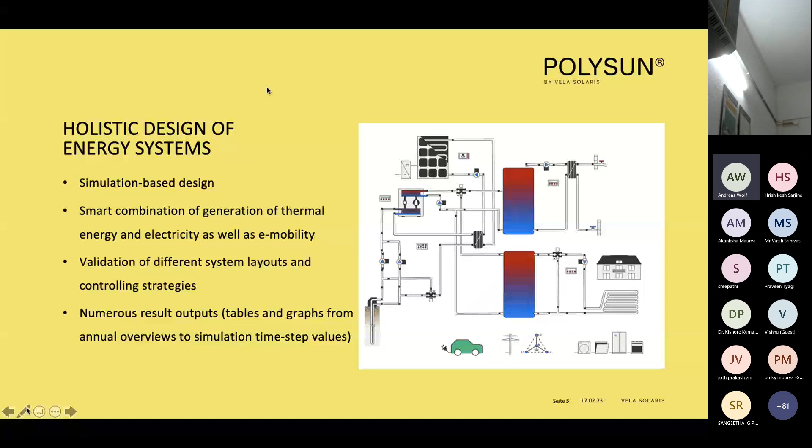Now I would like to pass on directly to the software, because that's why I'm here. So you should see the screen now. At the beginning, when you use Polysun for the first time, the screen is not really all that interesting because we still don't see the graphical user interface.

What Rishikesh has shown to you was several screenshots of the systems. We will see them in a moment. Now we are just starting because we are using Polysun for the very first time.

So we start usually with the wizard. The wizard is a starting help, an assistant, a project assistant. It's not really what Polysun is about, but this way you can start a project. Usually it pops up automatically, but you can also start it from here at the top.

Then you should first select the location. You can select the location from a map or from the database. We have worldwide weather data already implemented in the software, so you can choose the continent, the country, and then the city. You see there are many possibilities here.

But if you don't find your city, or if you want to go, for example, into the mountains, then it's good to open the map. This is OpenStreetMap - it's not Google Maps, but it works pretty much in the same way. You can search for a location, or you can zoom in.

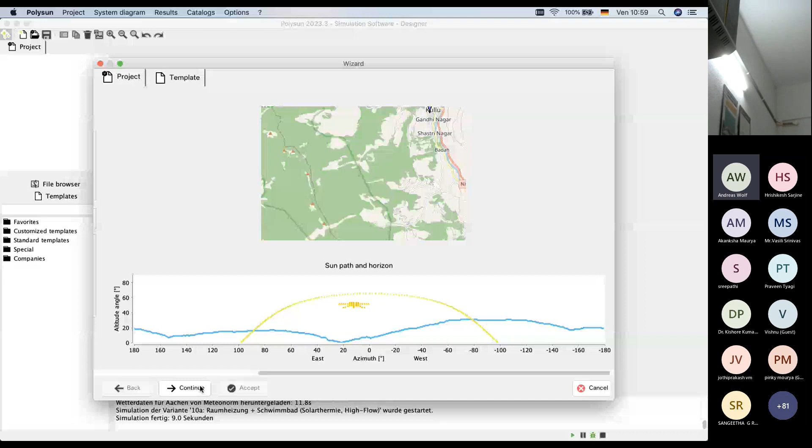And as I have mentioned, we have an enormous amount of templates. This filter can be very helpful to find the templates in the beginning. Now we want to start with a simple solar thermal system only for domestic hot water. Later on, we will look also at other templates.

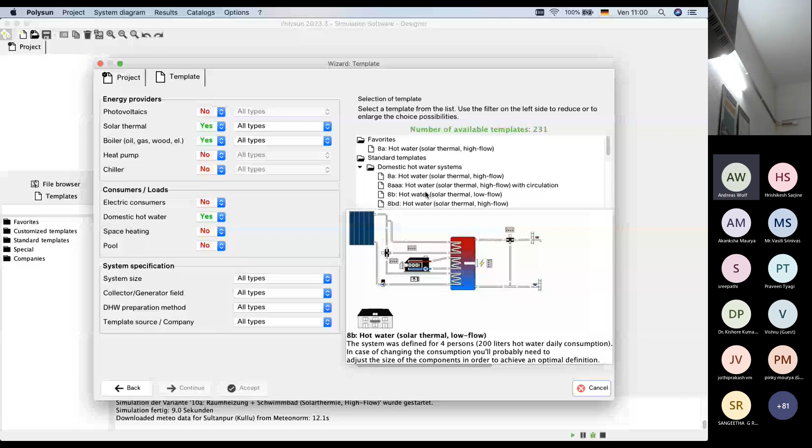When you hover the mouse here over the systems, you see the different system layouts. So in this moment, you should not select your template according to the components, but according to the system layout. Now we choose simply the first one, you click on continue.

And then you can define your domestic hot water demand, but we can do this also in a more detailed way later on. I will show this to you also then on the graphical user interface.

And then Polysun will suggest to you a certain number of collectors. Well, this is just a very small system. So if we make, for example, the daily hot water demand larger, 400 liters at 50 degrees, and then we continue, you see the suggestion is different.

Then you can choose your solar thermal collector from the database here. As you can see, you have here hundreds of solar thermal collectors. They all have been tested.

If you don't find your collector, additionally, you can also enter your own collector by selecting a line, copying a line, and changing the marked line. So that means you can work really with any solar thermal collector you like.

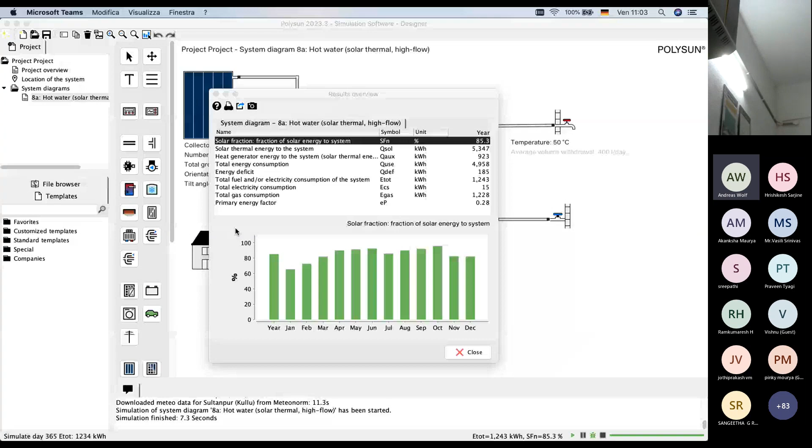And that means currently the simulation is running, and then we will get automatically the first results. But before we talk about the results, you must know that, as you can see from here, we have a wide array of results.

So you see, you cannot just view the results in one way. You have many different ways how you can view results. I will show this to you in a moment, how you can view them.

But first, I want to present to you the graphic user interface, because that is what you can see here. That is what you really work with in Polysun.

And you can see you have here on the left top, you have first information about the location of the system. As you know, we have chosen this location in the mountains. But of course, you can also change again the database. You can change the location again here.

If you click here on edit, you can see again the horizon. From that location, you see the exact sun path of that location.

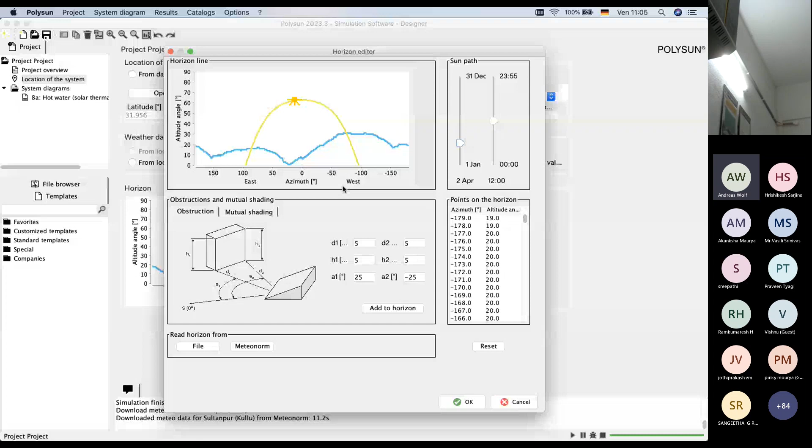This will always be adapted to the location which you choose. If we had chosen, for example, a location in southern India, this would be totally different. You can also add buildings as obstructions and consider the shading through that.

You have got here a list of the system diagrams which you can simulate. Currently we have only one because we selected it from the wizard, but you can easily copy the system here. We can rename it, we just name it two, but you can give it any name. And now you have the same system twice.

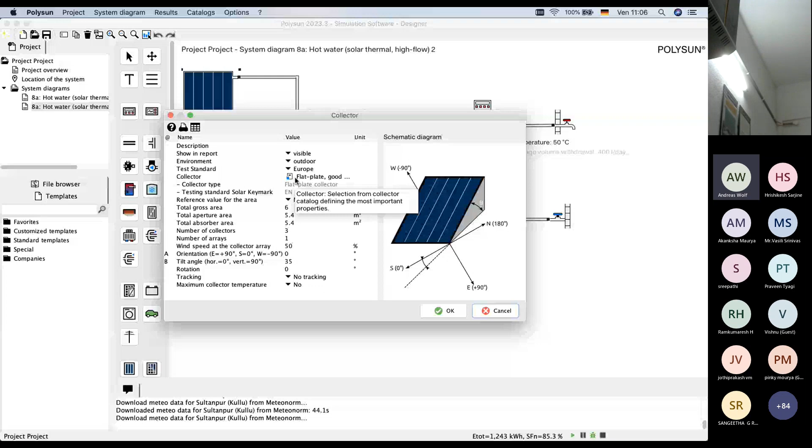Now you could, for example, do adaptations to the system very easily by clicking on it. If you want to interact with this system, you double click, a dialog window opens, and you can do your settings here. You can change the number of collectors and get back into the catalog where you can choose your collector or create your own.

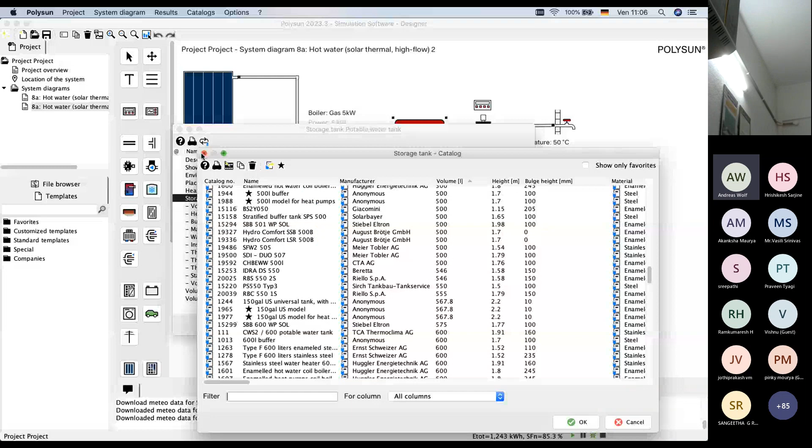This doesn't work only for the collector, it works for any component. So if you want to exchange the tank, try out a larger or smaller one, you go into the tank, choose another, and simulate again. Or you want to choose another boiler, or substitute the boiler with a heat pump - it works exactly the same way.

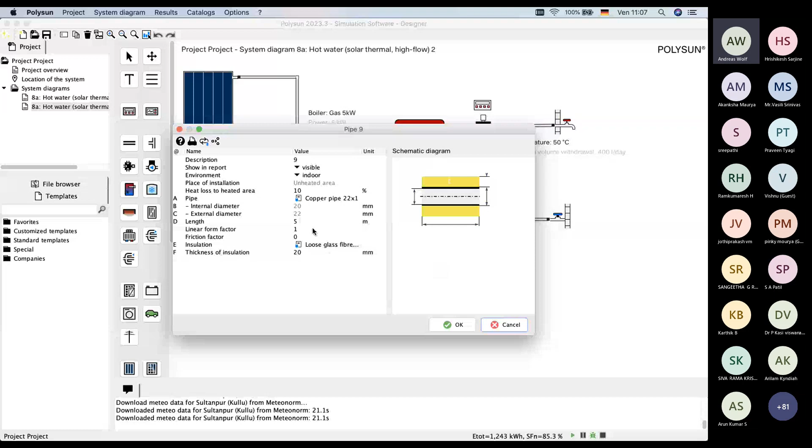You can even click on every pipe. You can make the pipes longer or shorter, change the diameter, change the insulation, and then calculate the heat losses which you have in the single loops.

You can also work here on the hot water demand, so you can change the settings for it. We've seen this briefly in the wizard, but you can do that also directly here.

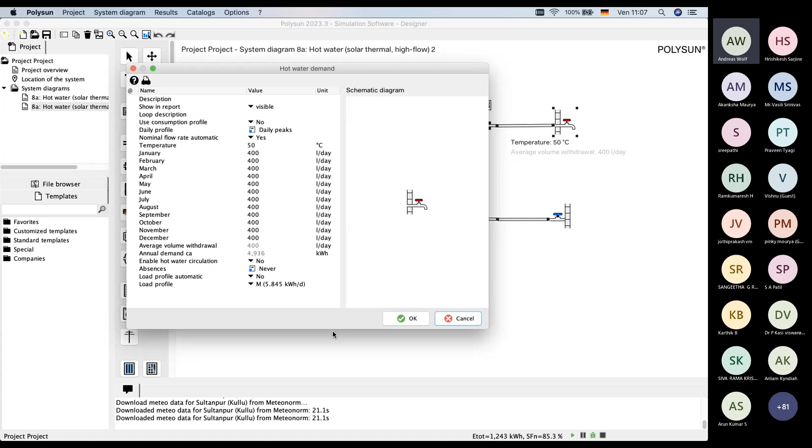When you have changed one value, you can compare the systems. You go back to the menu results, to system comparison, and you see the results of this system concerning the energy balance compared with two systems. This can be very easy and well done, and especially students will really understand how systems work.

So you see, one way to load a system is from the wizard. Another way is by copying it. And another way is from the template list down here. You see how many templates you have - at the moment you can't see them, but these are only 5 folders.

You can open these folders and you see subfolders filled with many templates. Then you open these folders, and when you scroll with the mouse over them, you see so many different systems, so many different hydraulics, which you can try out and see which one works best for your system.

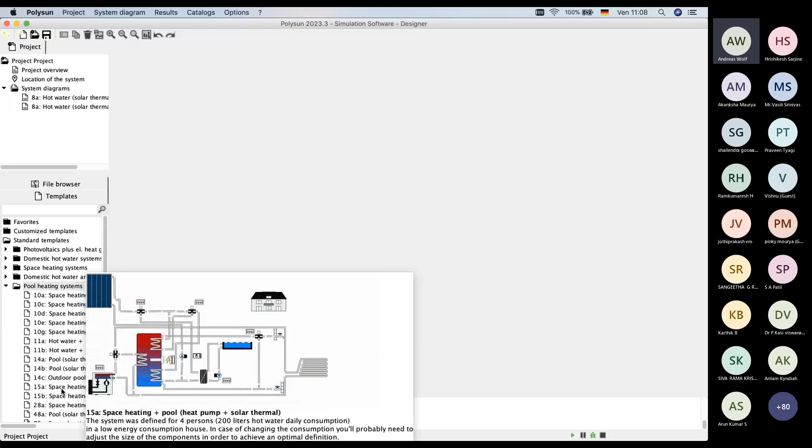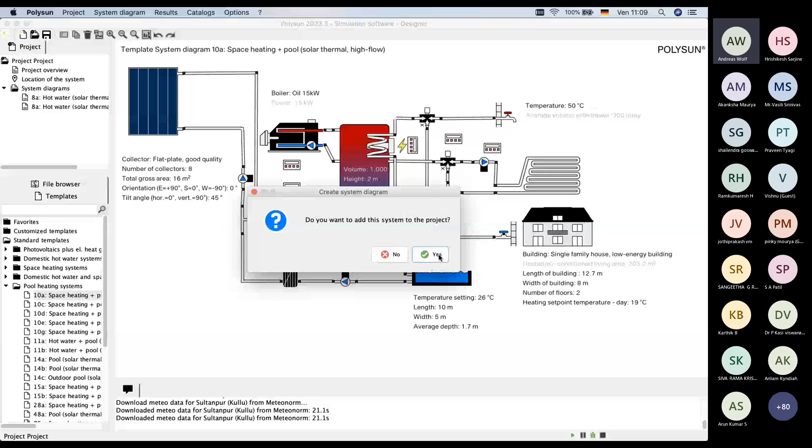For example, here you see we have a system with heating and with pool. If you like that, you can click on this system. Then the software will ask if you want to add it to the project, and you can say yes. Then you will see it up here and be able to simulate it. So you see how you can create templates.

With the designer version, we have standard, designer, and educational. Educational is the same as designer - you can even edit the systems.

You could say, okay, I like that system, but I want to delete this relay valve because I don't need it - it's a mixing valve here for domestic hot water. And then you delete it, and of course you have to delete also the other components which we don't need anymore. We reconnect the pipes, and we also don't need the controller anymore because that was for the mixing valve, so we delete that as well. And we can simulate the system again without the mixing valve.

Or you can also obviously add new components. For example, very easily, you add a PV system.

You can, for example, simulate this system with a PV system, and now of course we have to design the PV system. Just to tell you, you can practically edit all these systems. You already have 1,000 systems, but you can additionally edit them, so you have really no limits, and you can see how systems work.

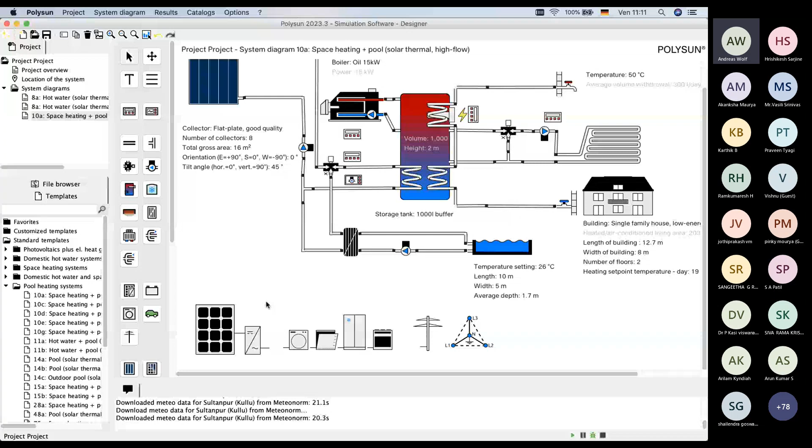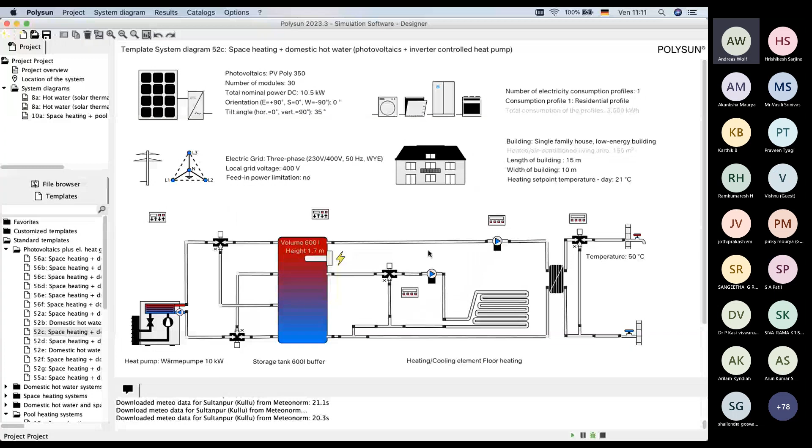Solar thermal is of course very important, but now photovoltaics is also really very popular, and you might want to see whether it's better to have a solar thermal system with a heat pump, or to combine photovoltaics to produce electricity and consume it with the heat pump. So you see, you have many possibilities. For example, we have systems already prepared: this one has no solar thermal, this one has the heat pump and the photovoltaic system, and you might see which one is more convenient.

So you can work in a very flexible way with Polysun. You might have noticed here, you've got all these boxes. When I hover the mouse on top of them, you see lines. These boxes are controllers, because one thing is to combine the components hydraulically, to make a system out of it.

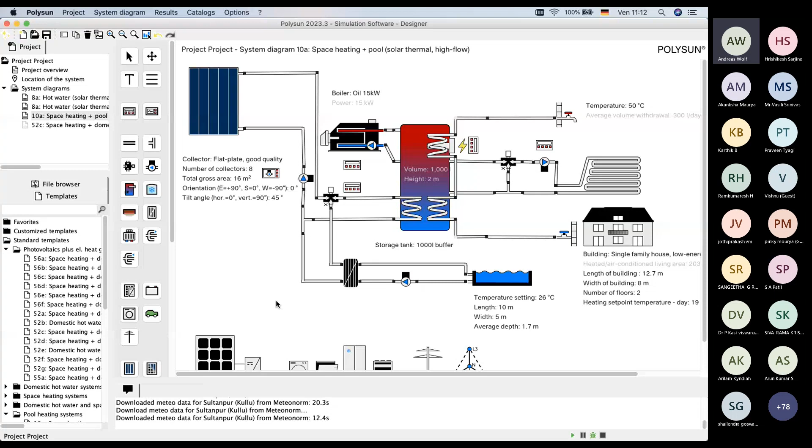That would be the work which, for example, the plumber does in reality. But it's not enough, the work of the plumber is not enough. Then you need also the electrician who connects the controllers with the single components, and that's just the same in Polysun. So we have the plumber here and the electrician here, and you see the lines here, meaning the controllers are connected to these components.

You see, for example, blue lines which are inputs, and red lines which are outputs. So if you want to simulate a system, you have to place your temperature sensors somewhere, and you can see here where they are placed. But you can't see it only graphically - if you open the controller, you will see exactly where these temperature sensors are placed and how this system works. I can't go into detail on that because it would require too much time, but you know now that this is possible.

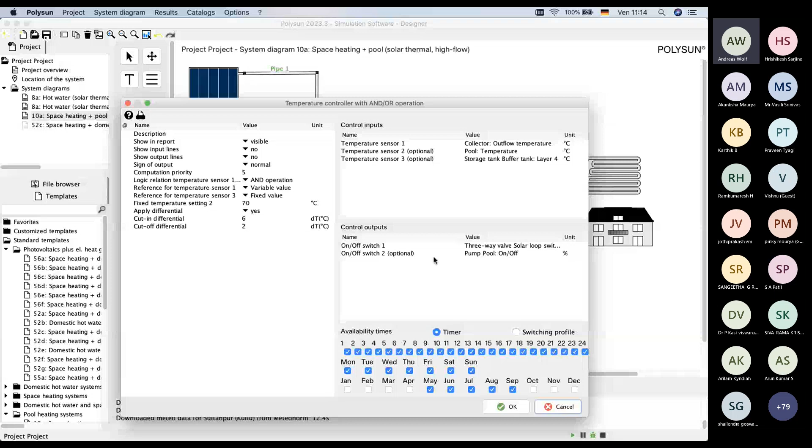And then, if you purchase a Polysun license, we can have a training course and go into this further. So this is how you can generally work with Polysun. What you see on the right side is always interactive, it's never just a picture. It's always interactive, and that's very, very important.

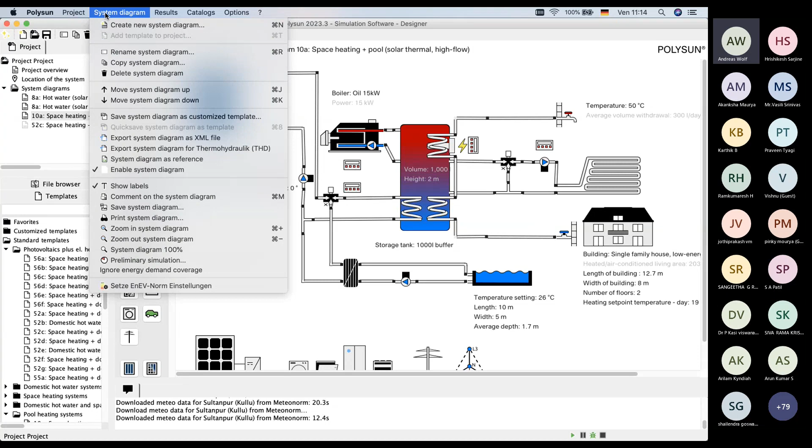Moreover, you have here on the top 6 menus. The first one is project - open project, close project, save project. I think that will be clear for everybody what that means. Then we have system diagram, which is also not so important because you mainly work with the system diagrams on the left top side, which we have already seen. Then we have the results, which we will have a look at in a moment.

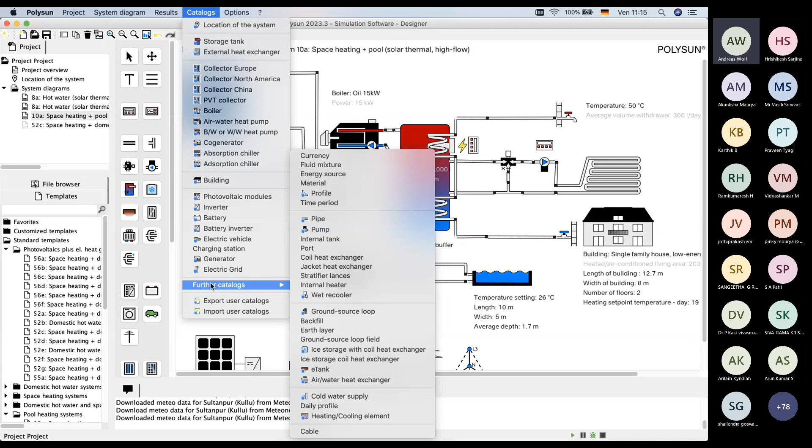There are many different results which you can view, so this will be interesting. Then you have the catalogs, which means the databases. You have lots of databases here, and you can also, as I have already mentioned, add your own components. So this is open to any user.

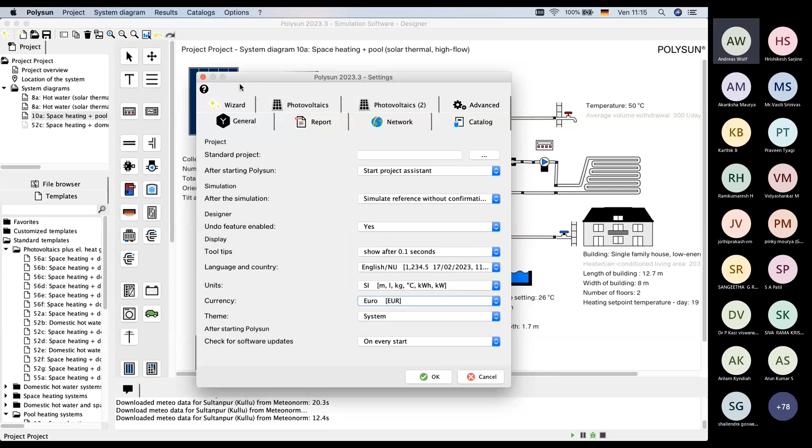Then you have options. That might not be so interesting now, but with settings you can change the language, you can change the units, you can change the currency. For example, if you want to simulate a system not only from the energetic point of view, but also from the economical point of view, you can change the currency here. Then there are other settings, but that might be the most interesting ones.

And then in the last menu we have the user manual. The user manual is currently a PDF file, meaning you can read it at any time, also independently from Polysun. It's about 300 pages long, so you have lots of information in this user manual.

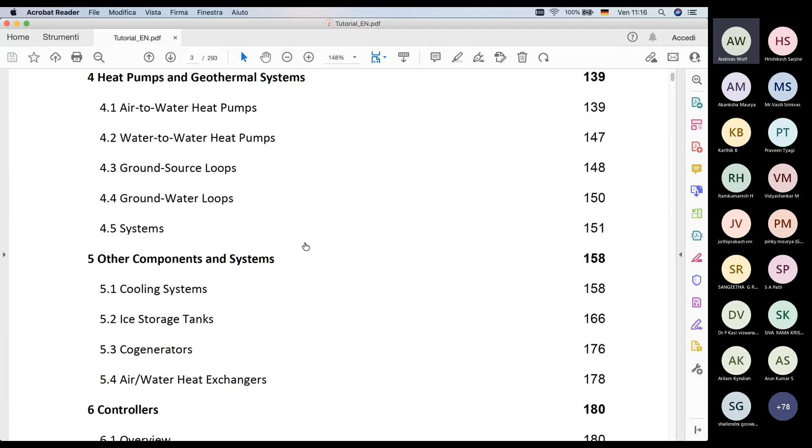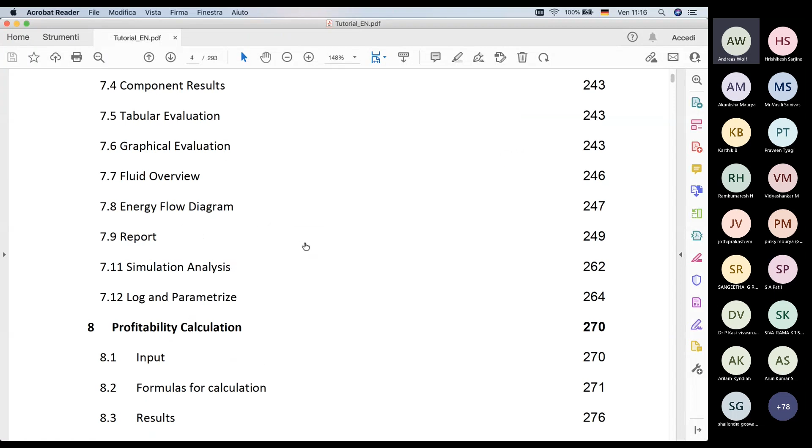You have here the basic structure of what we are talking about now - photovoltaics, which we'll see in a moment, solar thermal, which we've seen a little bit, then heat pumps, geothermal systems, other components, controllers - you see how important the controllers are - and the simulation results, which I want to present to you more in detail, plus profitability calculation. We also have a list of videos which you can start directly from the manual, so you don't have to look for them. You see, this is YouTube, and they start directly.

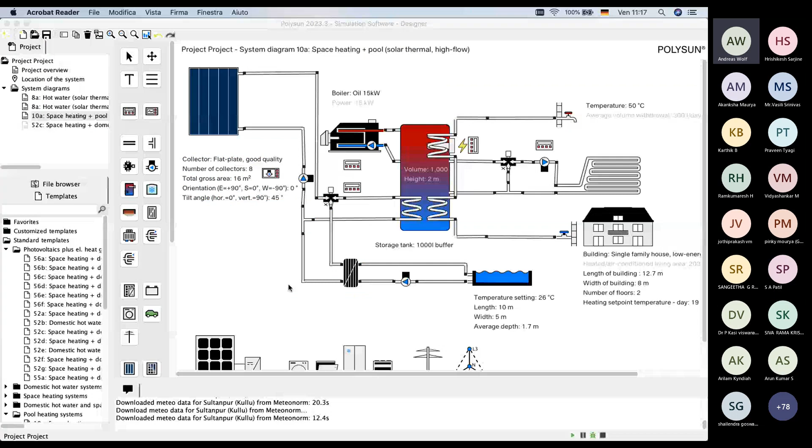So now I have presented to you in general a little bit the program, so you get an idea in general what Polysun is about. Now, as I said, we should have a closer look at the results. Not just the results for this system, because that's not maybe what is really interesting, but to see how it works with the results, which type of results you can get from Polysun.

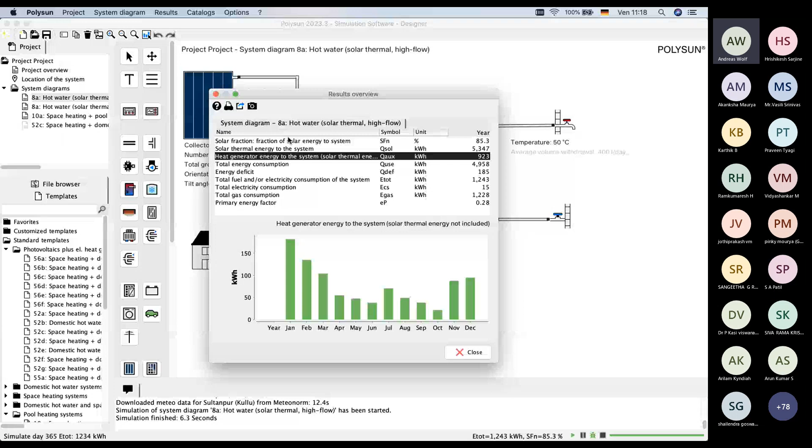After we simulated it the first time, you might recall, we got this simulation results overview. This is very rough, so I personally don't like it so much because I can't see so much here. So what I usually prefer is I go into system results directly. And when you go into system results, you can see better how the system works.

You can see here important values, like the total energy demand, the total energy consumption. We have both, because the demand is what you need theoretically, but the consumption is what you really need with this system, with the settings which you have done. Then you see, for example, the solar energy supplied to the system, and the auxiliary energy required from the heat generator. In this case, we have got the gas boiler.

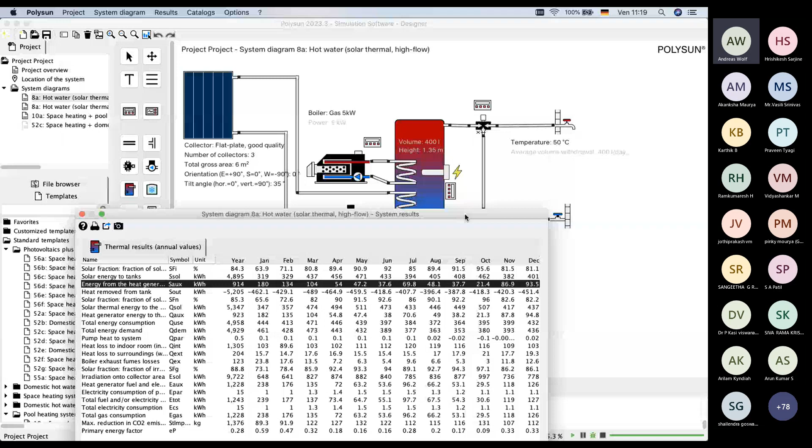And of course, from this, you can calculate the solar fraction. We have different solar fractions according to different calculations. This is the most common one, the most important one. It will be the solar fraction for the whole system, so you can calculate that. And then, of course, if you are not satisfied, you might want to adapt the system.

You can also go further into detail into component results. Here you get the details for all the components, because first you got the results for the whole system. You get an overview, so you get an idea. Here you get the results for the single components.

So if you want to check, for example, here the collector—collector means collector field, it's not just one collector, it's a symbol—then you can see here more in detail. Okay, here we have the solar radiation onto the collector field. We see the thermal output in that case. We can see also, for example, the average temperature of operation, the maximum temperature of operation, and the maximum values in total.

So we see we have some overheating issues here. You see, indeed, we have stagnation here in September and October. So these are all information which you get here.

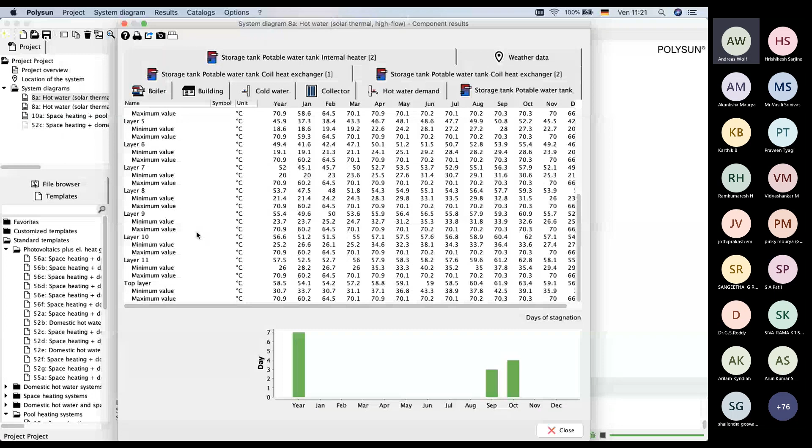And if you look, for example, further into the storage tank, then you can notice that we have layers. We have in total 12 layers in the storage tank, so we can see here the single layers. That means the storage tank is really a complex component, it's not just one layer.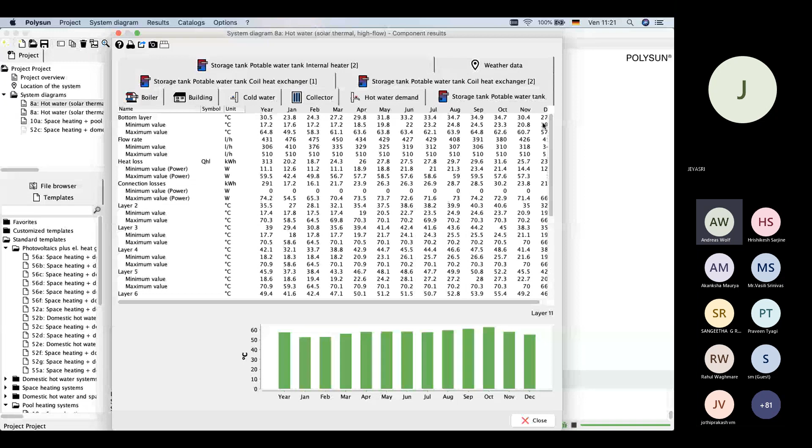It has been subdivided into 12 layers, because obviously with these layers we must simulate the heat stratification inside the tank. And so this we can do through these layers. Now here you see the temperatures again for the single month. Now you might say, well, I'm not really interested in those monthly temperatures.

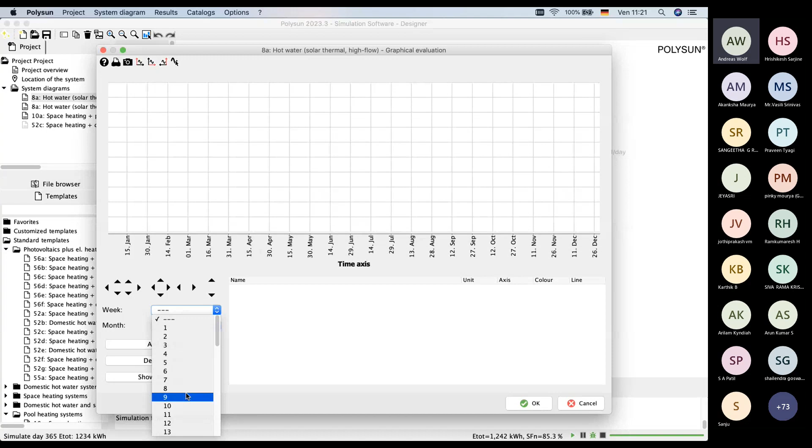I want to see this more in detail. I want to see the temperatures for the single moments. And then you can open the graphical evaluation. You can choose, for example, a week—so, for example, we could choose week 10, let's say.

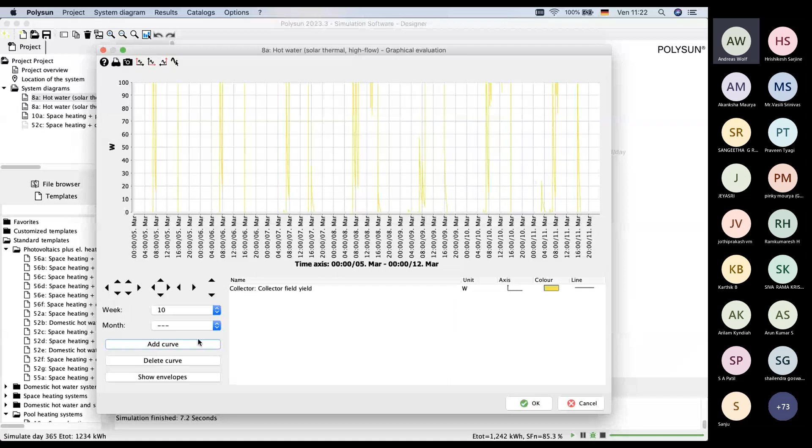You can add a curve, you can select here the curve. So, for example, we're interested in the collector field yield in this week. Then we could say we are interested in the storage tank, of course. Here we have again these layers—we're interested in the temperature at a low layer, and also in the temperature in the top layer, let's say, just to make an example. And then we can see here what happens in the system.

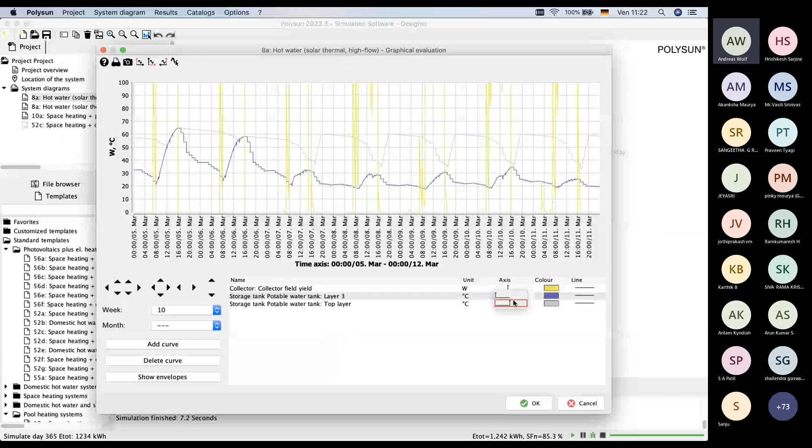Now it's still not very clear because we have two different units, so we must work with two axes. And also, as you see, the colors are not really well chosen. So we can adapt the colors here—well, this we could even leave, but now we have changed it, so it's even clearer.

And then you see exactly what's happening here in the system. We could, of course, even change the lines, but that's not necessary. You see here we have, for example, 2 very sunny days, and the water is getting quite hot, even in the lower part of the tank.

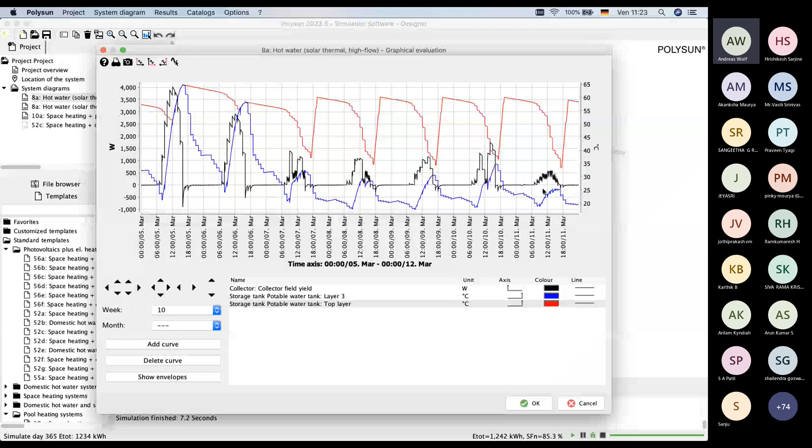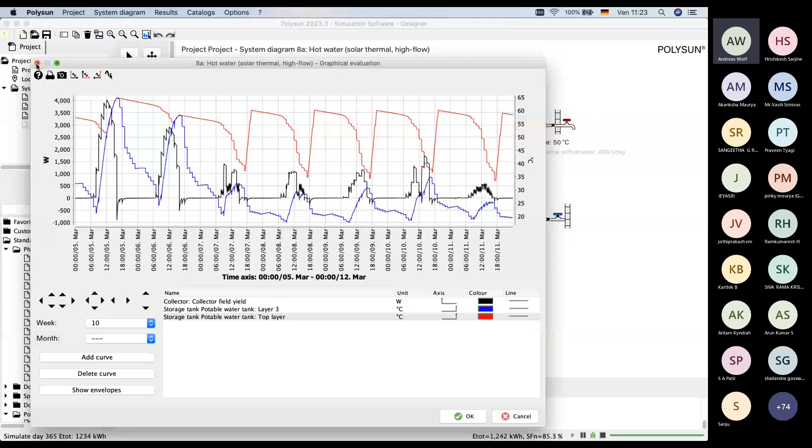But then later, when we don't have these sunny days, the temperatures are dropping quite sharply in the lower part of the tank. Of course, in the upper part of the tank, they are kept high thanks to the boiler. So this is just one example, but with the graphical evaluation, you can really decide what you want to see and analyze in detail how the system works. That's very transparent.

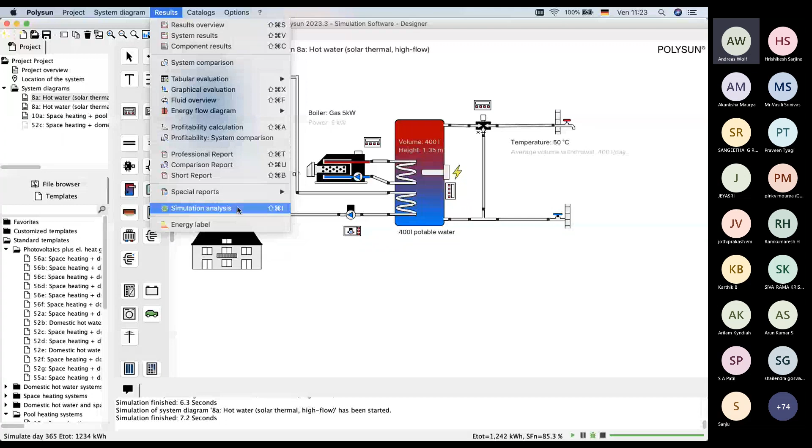And if you want to know even more, you can go to the simulation analysis. There you can see the temperatures directly on the screen for the single time steps, so you see exactly what's happening in the system at each time step.

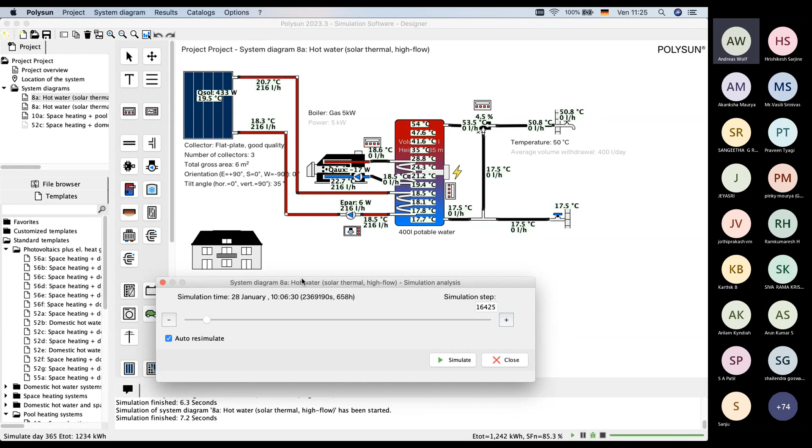And then you can see exactly what's happening. So you see, for example, here we have flow, the exact temperatures in the tank, everything. When you click here on plus, you see how much time passes from one time step to the next, so it's very transparent. This is a great tool to do analysis.

So you already get the idea—you have a very wide range of results, from very rough to very detailed. If you look at the results overview, the system results, it's more on the rough side to get an overview, but then you have the graphical evaluation and the simulation analysis for more detailed analysis. So you must decide what you're interested in at a certain moment.

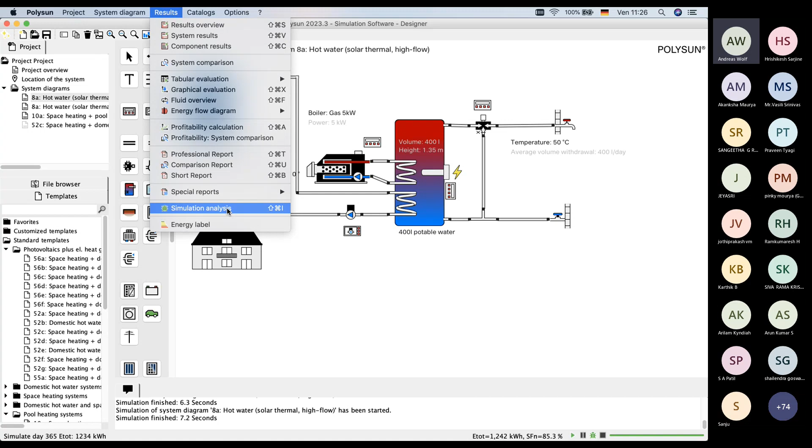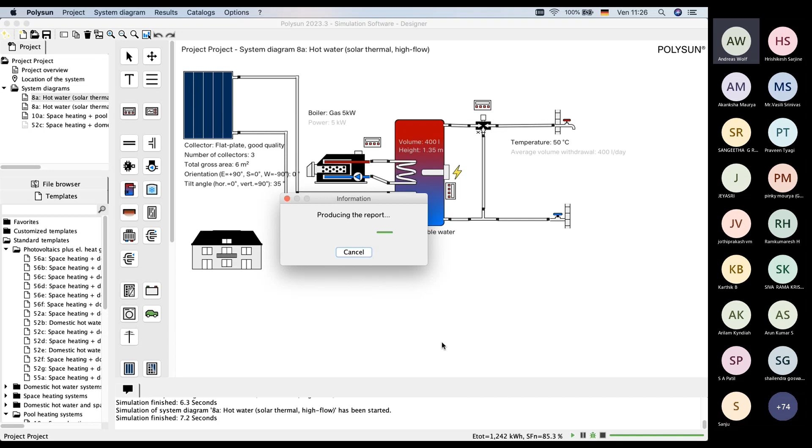You also have reports. We can open one just to give you an idea, but the report is not really made for you—it's more made for the client. The report presents results to the client in an easy way, so you don't have to put all the results together, but it doesn't help you analyze. It's more for presentation purposes.

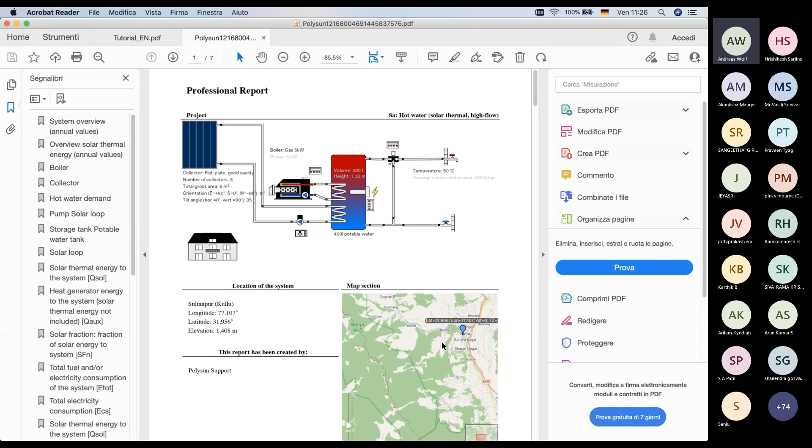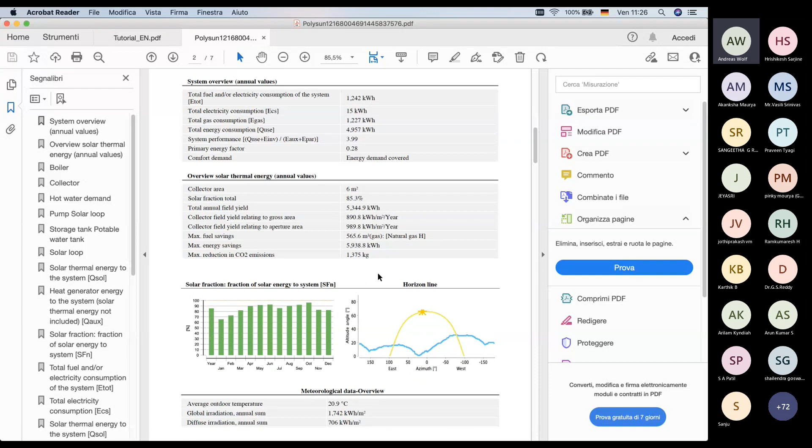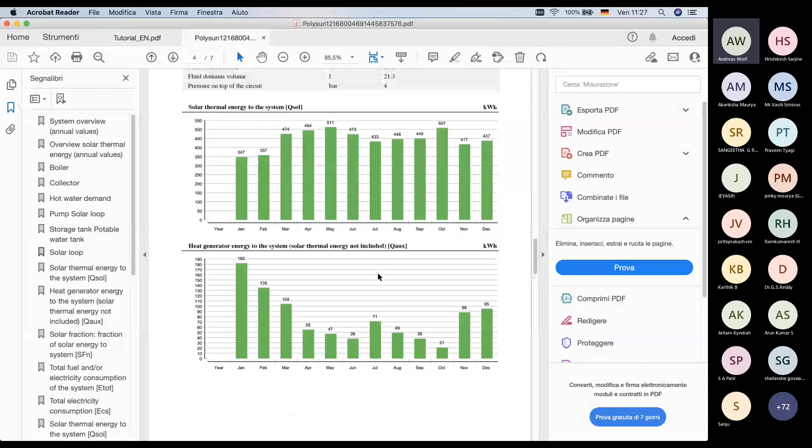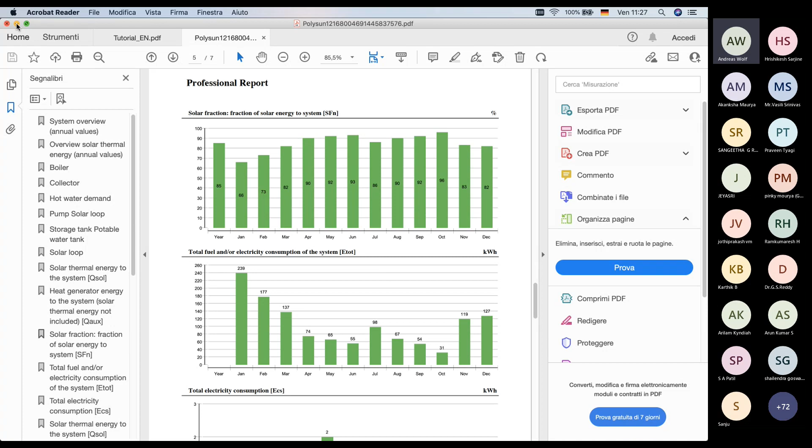And here you can see the system again, the location which we have chosen—you recall that on the map—a rough summary of the components, and then only the most important results, those the client would usually be interested in, like solar fraction and solar thermal energy to the system. So this is not really for academic purposes. You can use it anytime, of course, but the idea is more for commercial purposes.

So now you see how generally Polysun works. We have seen a solar thermal system. Of course, we should also see a photovoltaic system. So I go back to the wizard—you can do it manually too, of course, but I'll go back to the wizard since it's the first time. I leave the same location, which we have already chosen.

And then we have got here now, of course, a different filter setting because we are looking for PV systems. As you have seen, we have also PV systems combined with other technologies. But now, as we do it for the first time, we want to try out a PV system which we like. And then here you can set your PV modules—this is actually the largest catalog of all in Polysun.

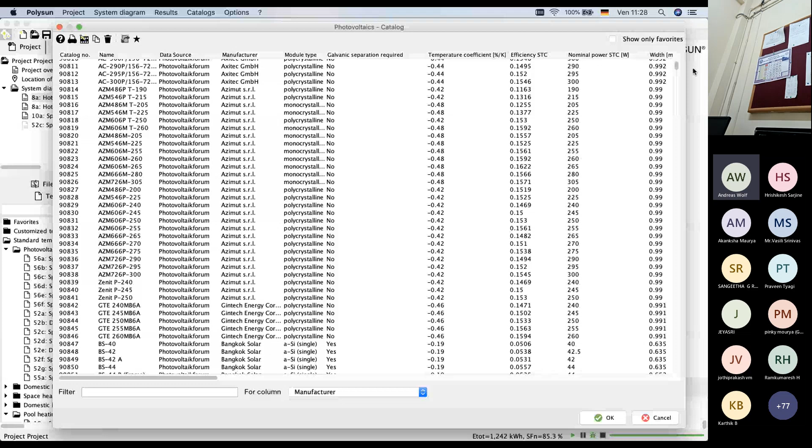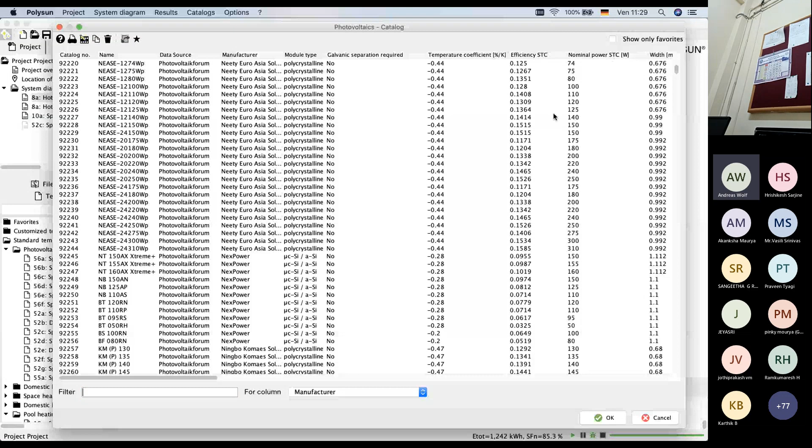If I scroll down here and you look at the cursor on the right top side, you see it doesn't even move—this is really enormous. So you can choose your preferred PV module here by using the filter, then clicking on the header line of the catalog to sort them according to their nominal power, for example.

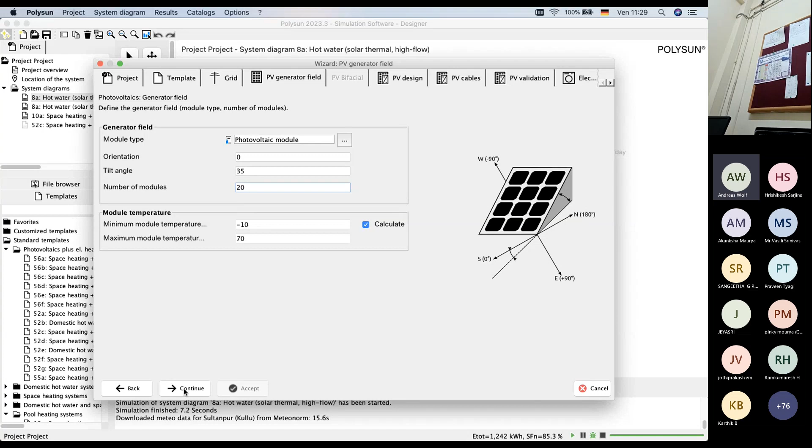So anyway, you choose your PV module, orientation, tilt angle - that's the same as before. Then you can write here the number of modules. Let's say, for example, 20, can be also 200, or 2000.

It can also simulate large systems. And then Polysun will suggest to you a suitable inverter. Also here we have a list of manufacturers. You can also again enter your own inverter if you like. Then you click on continue.

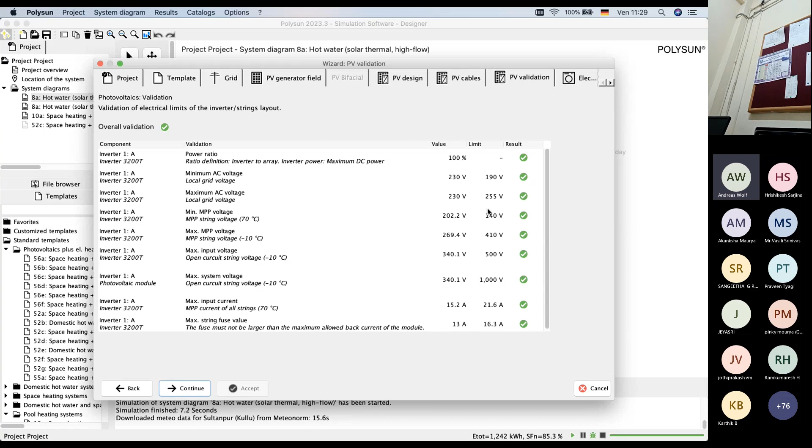Polysun checks if all the electrical limiting values are correct. That's the case, we click on continue again. And then you can define here the electricity consumption profile. So if you have, for example, also self-consumption, you can choose from different profiles. And here you write the annual consumption, then you click on accept.

And again, same procedure as last time. After the weather data have been downloaded, a simulation is done. So you will see here in a moment, after they have been downloaded, that the simulation is carried out. And this works always in this way. You can also work with weather data which you input by yourself. This is also possible, but usually it works this way.

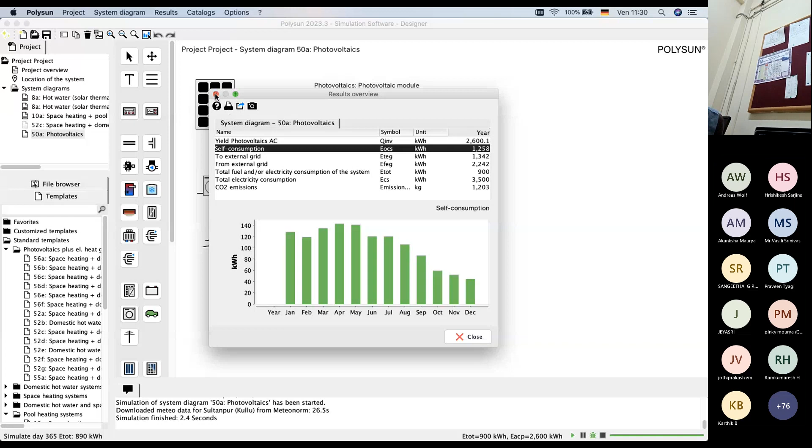So and then of course you have also here different results, system results, component results. So that's just the same way again what we have already seen.

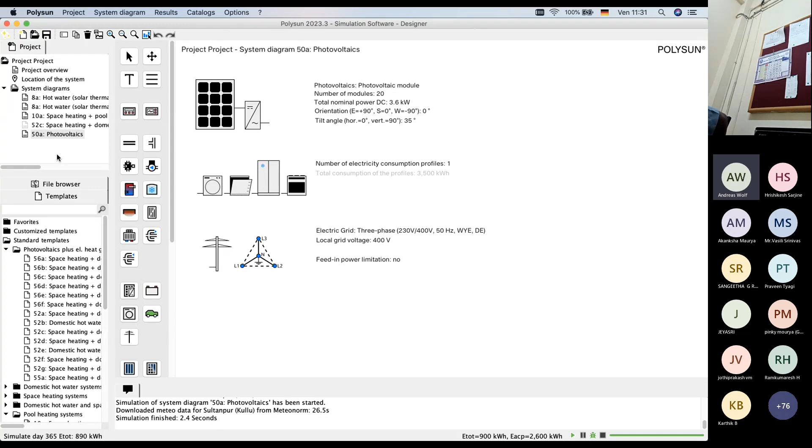This is more or less to give you a general idea. As I told you, we have also the combination of thermal and photovoltaic systems, and you have, as I said...

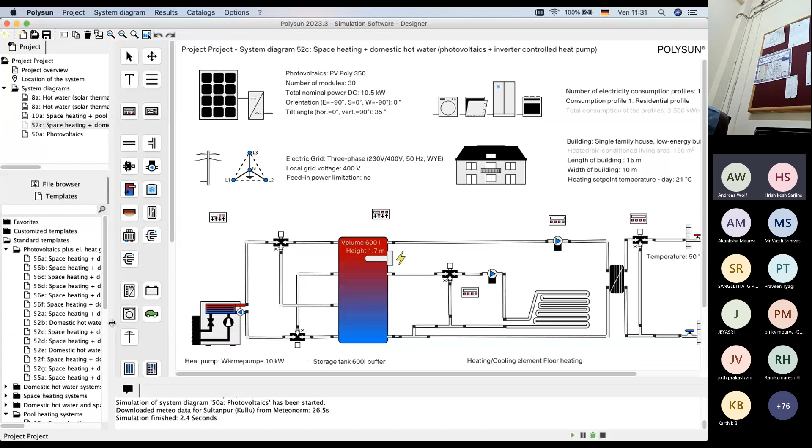Hello. Andreas sir, yes, hello. Yeah, Sandeep Joshi sir, I think so. He is having some doubts also. Sandeep, anyway sir, could you unmute yourself?

I have arrived, yes, I have arrived, anyway, at the end of my presentation. So I think it's anyway now a good moment to give the word to you. And if you have any questions, just ask them, please. Go ahead.

Okay, sir, okay. Sandeep sir, yeah, good afternoon. Am I audible there? Yeah sir.

My small query regarding the same demonstration regarding solar photovoltaics. I wanted to know, is it possible that if I change the temperature of the solar photovoltaic module, can the system give me what is the probable outcome?

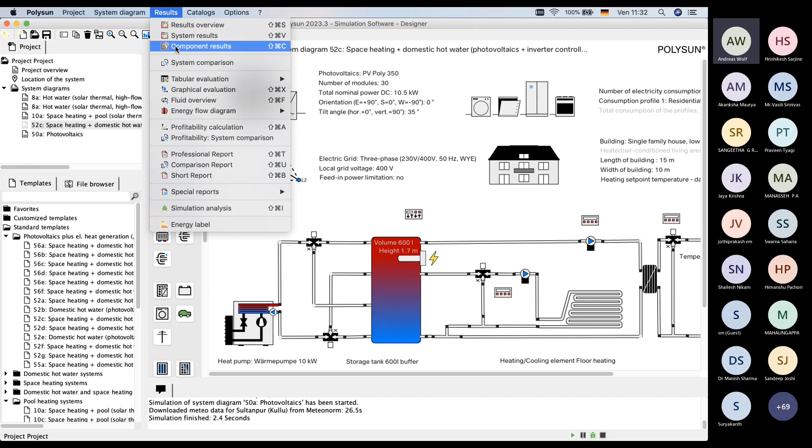Yeah, well, of course the temperatures of the PV modules are also being calculated. Because that depends, of course, on the situation of the system, on the weather data, and also on the rear ventilation. So there are many settings which you have to do to see the temperatures. But then if you go, for example, into photovoltaics, you can see here the average module temperature, and here the maximum values. So then, of course, with the graphical evaluation, you can check the module temperature at every moment, not just the average or maximum temperature. So you can check the temperature for every moment. This can all be checked, but the outcome of these temperatures depends upon the conditions of the system.

Yeah, all right, I understood. Thank you. You're welcome.

Hello, hello. Sir, is this software installed... is it able to run on 4 GB RAM? Actually, my laptop is the old version, 2013, and my laptop has 4 GB RAM. So can this software run on 4 GB RAM?

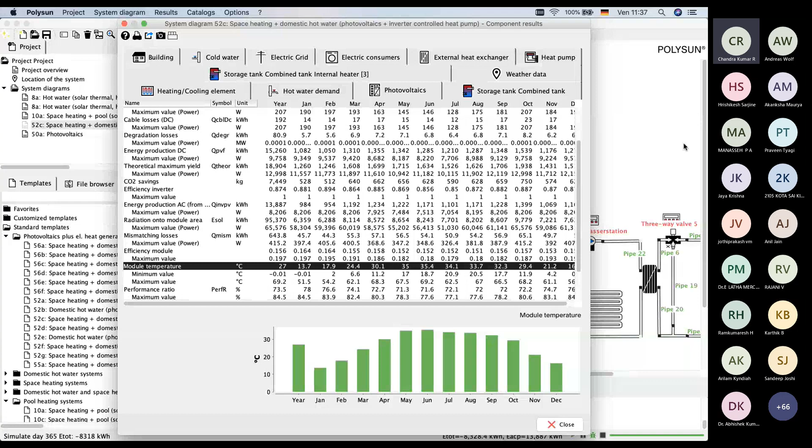Usually the support is given to those who have got a license. But of course, if you have some questions, you can ask us, and we will always answer your questions and look into the issues. But the full support, concerning projects and how to work with the software, training and all that, can only be done for those who already have a license.

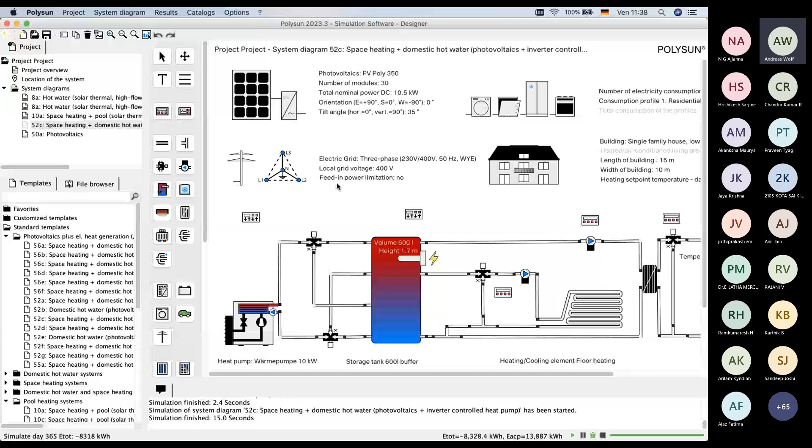Sir, my question is, are there any video tutorials available for this software, so that whenever we are doing simulations and we have doubts or need to change parameters? Yes, there are some videos which are free, which you can access even now. You can find them, for example, in the manual, as I showed you before. We have these videos.

But also, I'm not sure if this session is being recorded. So maybe you can get this to have a look at it later on, or we can provide you something, that's no problem.